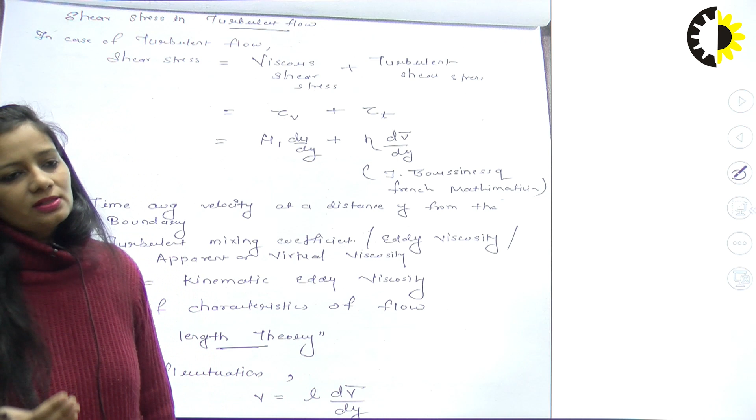We have gone through, and we are repeating it, the shear stress in turbulent flow. The shear stress in turbulent flow is a combination of viscous shear stress and turbulent shear stress, as we know very well. Viscous shear stress is a stress contributed to fluid flow due to the viscosity in between the layers.

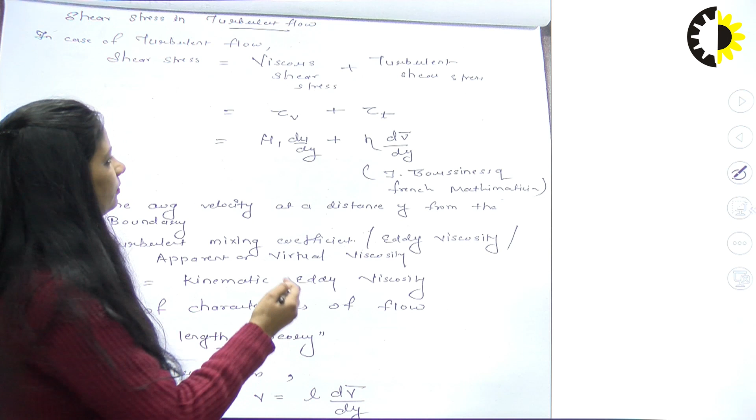Now how can we formulate it? By using the formula tau equal to mu du by dy, where du by dy is your velocity distribution and mu is your viscosity.

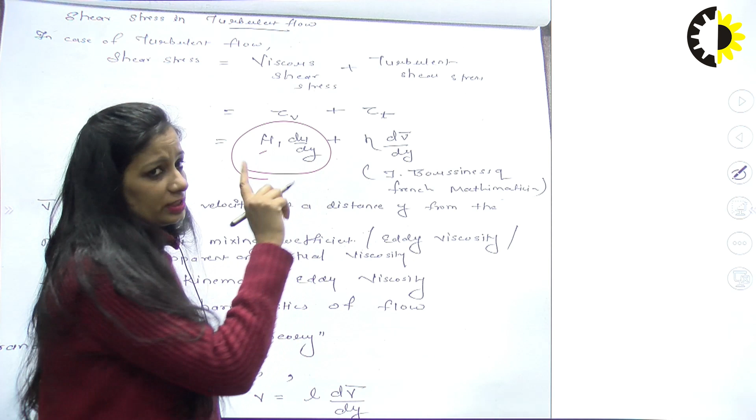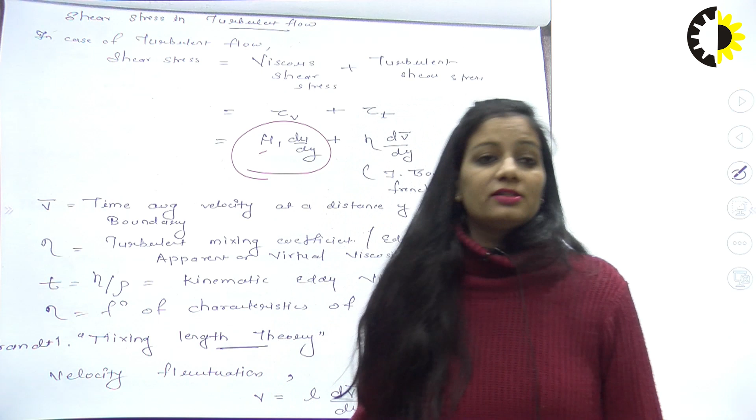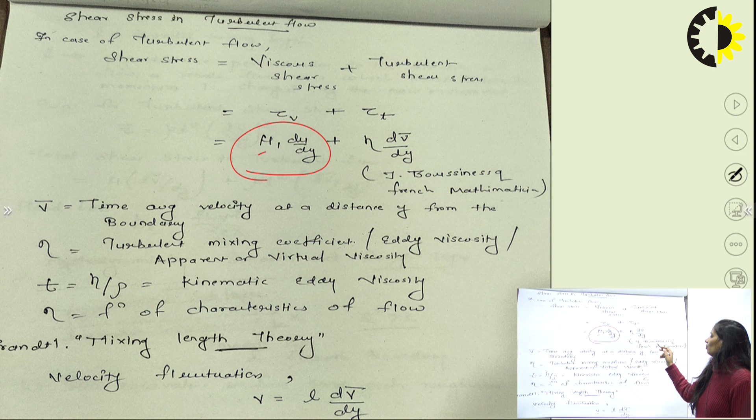Now what is your turbulent shear stress? There are many equations given by many scientists and researchers. The first equation we are going to study today is given by J. Boussinesq, who was a French mathematician, who gave an equation for turbulent shear stress as eta dv by dy.

Here your dv bar, or dv, is actually your time average velocity, at a distance y from the boundary. So v bar is your time average velocity at a distance y from the boundary.

Now what is eta? Eta is your turbulent mixing coefficient, or eddy viscosity. You can simply write it as eddy viscosity. Divided by rho, we'll get it as epsilon, or you can simply write it as T. Now T is actually your kinematic eddy viscosity.

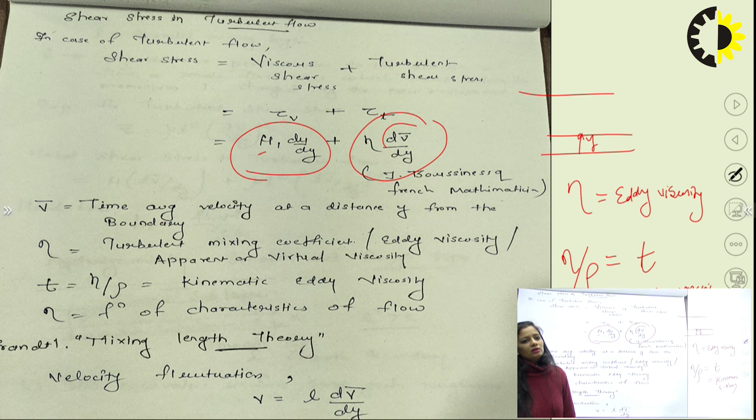Now eta actually depends upon the characteristics of flow, that is, how much the particular flow is turbulent. So your eta will be more if the amount of turbulence is very high. The value of eta also depends upon the Reynolds number of the turbulent flow. If the Reynolds number for a particular kind of flow is more, the value of eta will be more. That's why we say eta is a function of the characteristics of the flow.

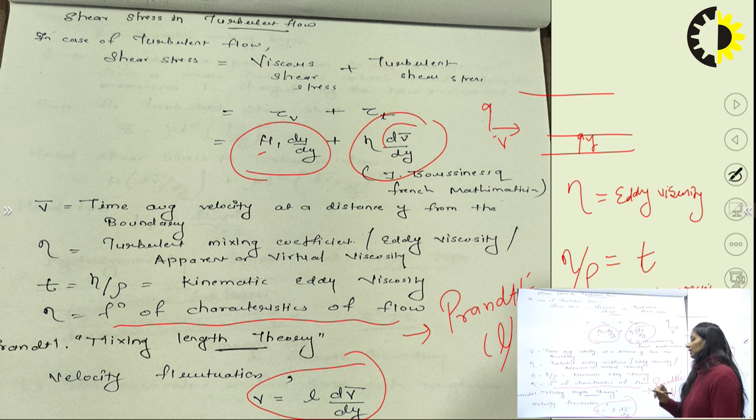Now we are going to analyze Prandtl's mixing length theory. This theory was given by Prandtl, where he formulated the velocity fluctuations, that is, how the velocity fluctuations in the x direction and y direction relate to the velocity gradient. He gave a formula where velocity fluctuation v dash is equal to L dv bar by dy, where L is formulated as the mixing length, or Prandtl mixing length.

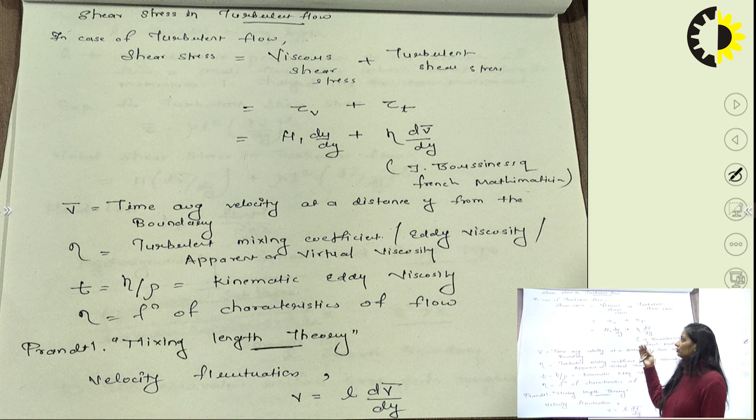Now again, shear stress in turbulent flow, we already talked about this. L is your mixing length, or Prandtl mixing length. How can you formulate L? L is equal to the average distance perpendicular to the direction of flow that a small fluid mass travels before its momentum is changed by the new environment.

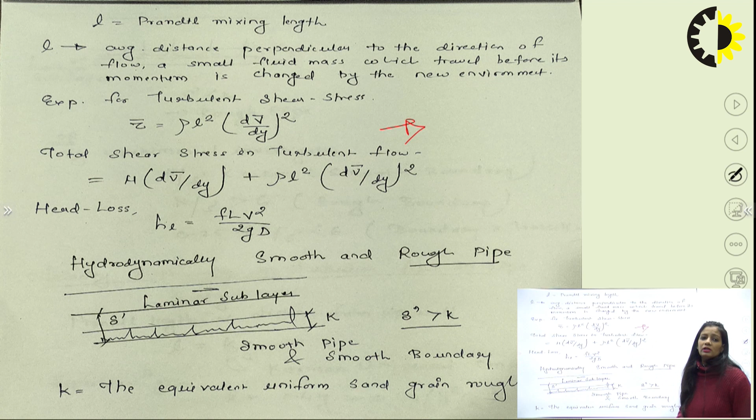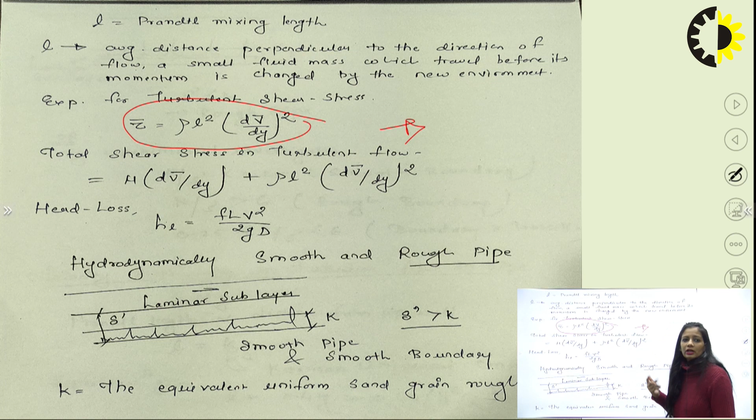Now what is the expression for turbulent shear stress? It will be tau equal to rho L square dv bar by dy square. This is the equation formulated and given by Prandtl, which we can use as turbulent shear stress. Now apply addition of both the viscous and turbulent shear stress, and that will be your total shear stress in any kind of turbulent flow. You can write it as this equation.

Now, when we are going to calculate the head loss in any kind of turbulent flow, how do we calculate it? We use the Darcy-Weisbach equation, which we know very well. We can use that particular formula here also. Your HL will be equal to FLV square by 2GD.

Now, what is your hydrodynamically smooth and rough pipe? How can we define it? It depends upon the length, or rather the height, of the laminar sublayer. We know very well what is the laminar sublayer.

This is a zone in turbulent flow where the flow characteristics are actually laminar, or the flow behaves like a laminar flow. Here you can see that the distance from here to here is actually the height of the laminar sublayer. The distance k here is your equivalent uniform sand grain roughness, or the average height of roughness. For example, this is your k.

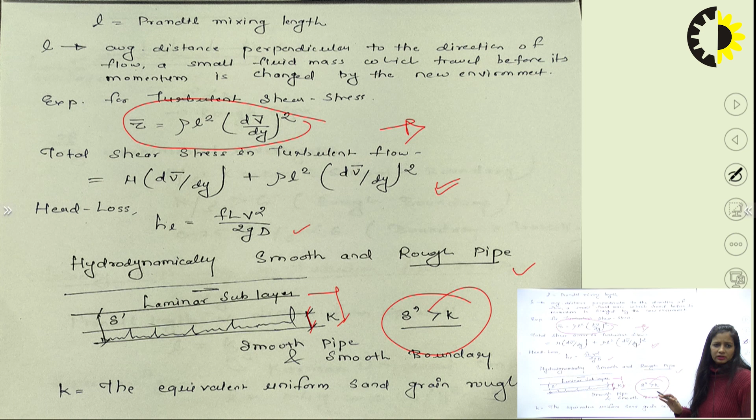Let us suppose if your laminar sublayer height is more than the roughness height, what will we say? In this case, we'll say the pipe is smooth, or the boundary is smooth. But in the other case, just opposite of that, if the laminar sublayer is actually less than the equivalent sand grain roughness, then we will say that the particular pipe is rough.

By experimental investigation, you can differentiate between smooth and rough boundary. There is an expression which states k by del less than 0.25, then you say it's a smooth boundary. If it is greater than 6, you say it's a rough boundary. If it is in between 0.25 to 6, the boundary is in transition.

Now the velocity distribution in turbulent flow in pipe. You can formulate it using Prandtl's equation. Prandtl says the mixing length L is proportional to y, where y is the distance from the boundary. When we move away from the boundary, the Prandtl length is proportional to y. More far from the boundary, the more the value of L will be.

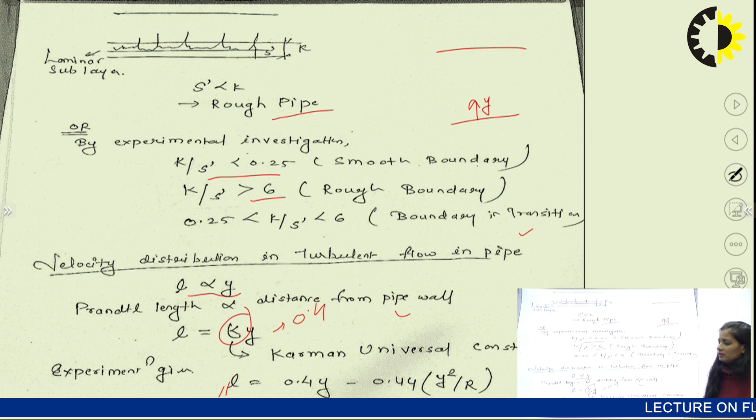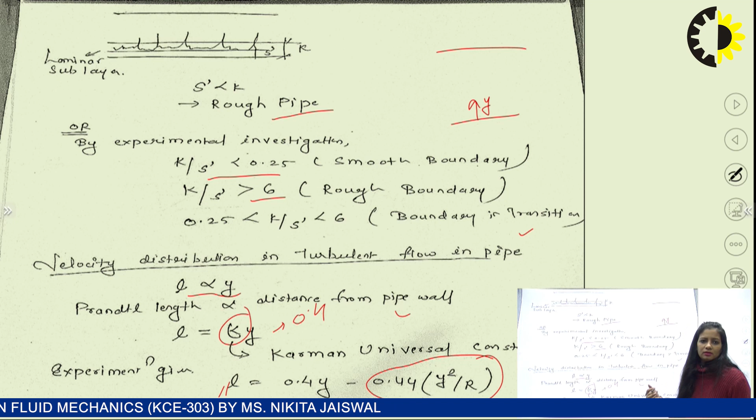So L is proportional to y, or the Prandtl length is proportional to distance from the pipe wall. When you remove that proportionality sign, you get kappa, or the Karman universal constant. The value for the Karman universal constant we assume as 0.4. There is another equation given by Prandtl: L equal to 0.4y minus 0.44 y square by r. This term is very negligible when we are very close to the pipe boundary, so by comparing this equation and this equation, you can get kappa as 0.4.

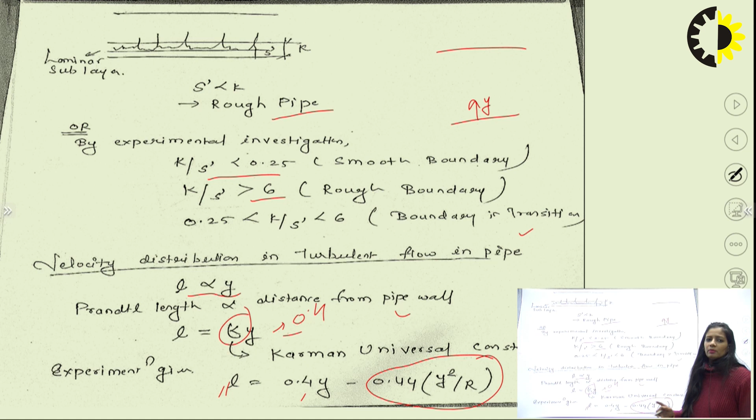Kappa is the Karman universal constant. For y very small, kappa is 0.4. Now the equation for tau is rho L square (dv by dy) whole square. Just put kappa y in place of L, and you get the new equation for tau as rho k square y square (dv bar by dy) whole square.

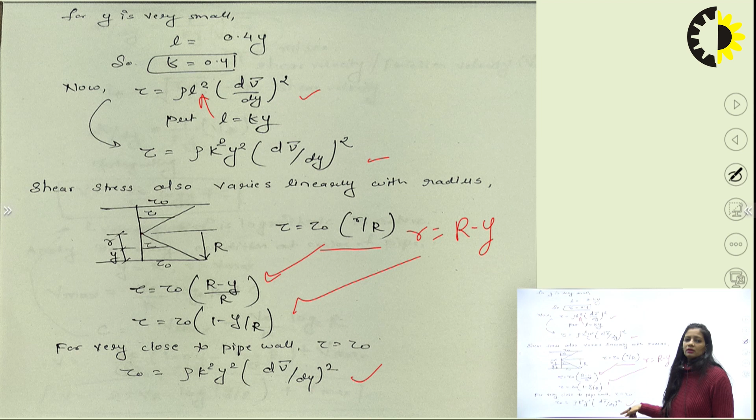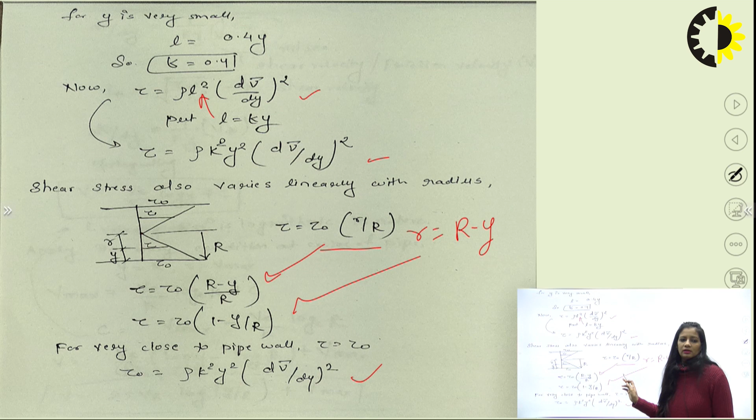Get an equation for tau as tau naught times r by capital R. Now just put small r as capital R minus y, and you get tau equal to tau naught times (1 minus y by capital R). For very close to the pipe wall, tau equals tau naught. Write the previous equation in terms of wall stress: tau naught equal to rho k square, where k is kappa, the value 0.4, times y square times the velocity gradient square.

Now find an equation for dv by dy. You get it as 1 by kappa y, times root over tau naught by rho. This term, root over tau naught by rho, actually has a unit equal to velocity, so we call it shear velocity or friction velocity, represented as v asterisk. Put v asterisk into this equation.

Now you get an equation like this. Our purpose was to find the equation for velocity, so you just need to integrate that equation. Integrating once, since v asterisk and kappa are constants and the only variable is y, integrating 1 by y gives log y plus c, a constant of integration. So you can see that the velocity distribution is logarithmic in nature.

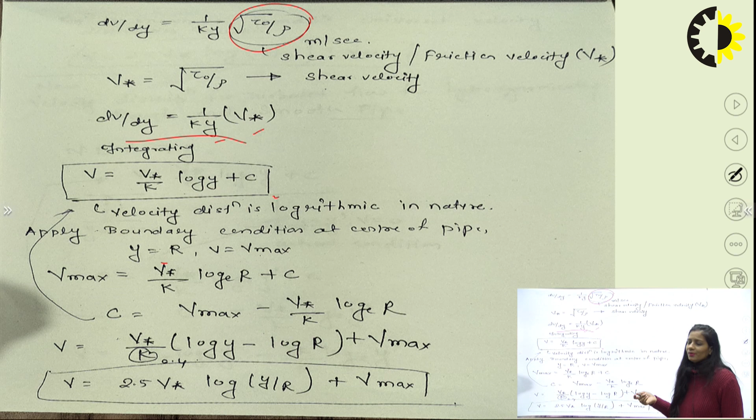Now apply the boundary condition at the center of the pipe: at y equal to capital R, v equals v max, since the velocity at the center of the pipe is maximum. So you write v equal to v max, then put it in the above equation to find the equation for the constant of integration. Put that constant back into the previous equation and solve it to find the final result.

Okay, solve it, that means put a value of kappa as 0.4, you will finally get the formula for final velocity distribution in turbulent flow in terms of Prandtl equation, or Prandtl concept. The final formula for velocity will be equal to 2.5 v asterisk log y by r plus v max. This equation is known as Prandtl's universal velocity distribution equation.

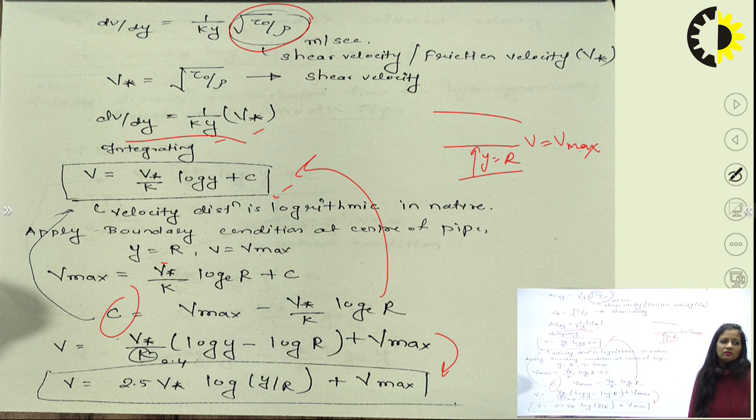So now the velocity distribution for turbulent flow. This is the previous equation, the basic equation. V equal to v asterisk by kappa log y plus c.

So here what the actual condition states: when you apply the derived equation to the actual form, or apply some experimentation, what theoretically we say is that the velocity at the wall will be 0, or at y equal to 0, velocity will be equal to 0 - that's the theoretical concept. But in the actual situation, when you apply the same formula, you will not get velocity as 0 at y equal to 0; instead you will get it as minus infinity.

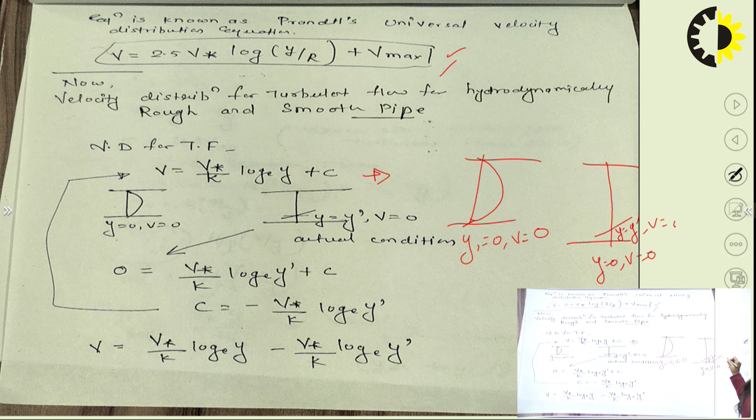So what we assume is that according to that particular derived formula, at y equal to 0, v is not equal to 0. Instead, we consider that at some distance from the wall, let us suppose y equal to y dash, the velocity will be equal to 0. So the actual condition we have stated: at some distance y equal to y dash, velocity will be 0.

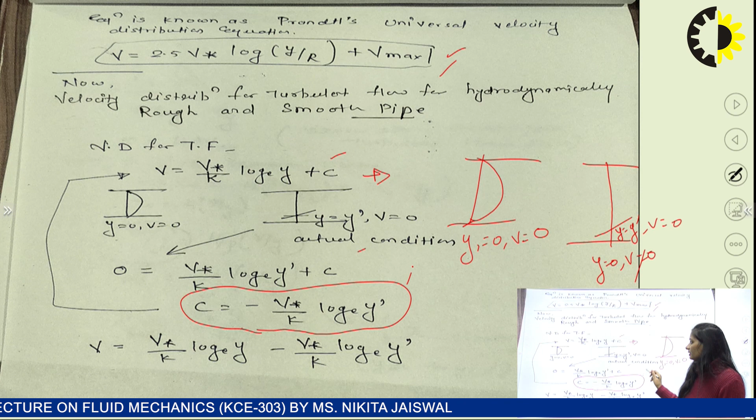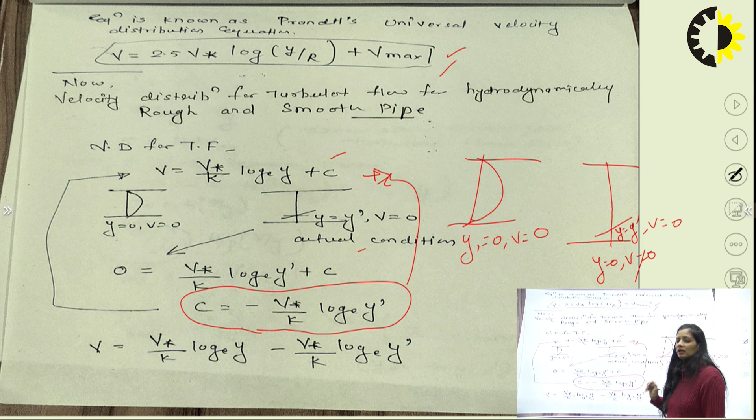Now in this formula, put v equal to 0 and y equal to y dash, and again formulate the equation for the constant. The equation for the constant is minus v star by kappa log e y dash. Now put the value for c back in the equation, and we get v equal to v asterisk by kappa log e y minus v asterisk by kappa log e y dash. Now just set that equation aside, we have formulated it.

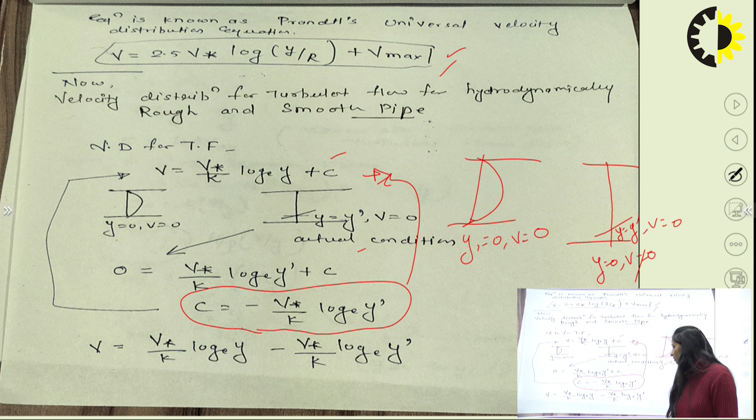Now come to how we can use that formula again in the new topic of velocity distribution in a smooth pipe. We know how we can write the equation for shear stress in a linear form. In a smooth zone or smooth pipe, there will be a linear distribution in the zone close to the pipe boundary. So we can write this as dv by dy equal to simply v by y.

So the viscous shear stress predominates over the turbulent shear stress in case of a smooth pipe. So when writing the final equation for shear stress, we are putting the velocity gradient as equal to v by y in the viscous stress formula only. Now just divide by rho on the LHS as well as RHS. This equation for shear stress in the boundary becomes: tau naught by rho is actually equal to v asterisk square.

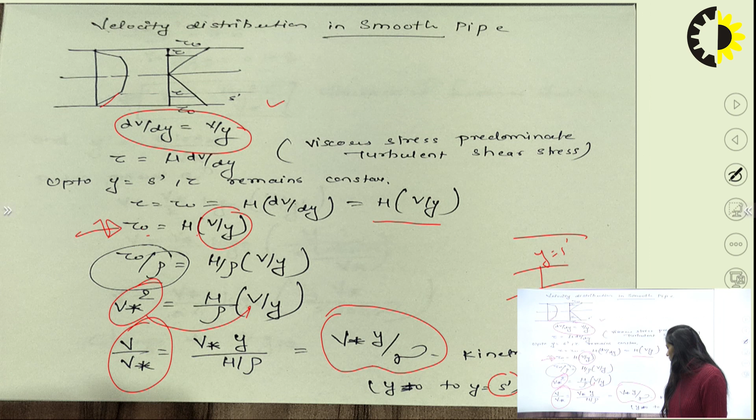Various experiments have already worked upon this particular equation and stated that there are two equations written here. You need to remember that V star delta dash or del dash by nu is actually equal to 11.6, okay. This is at the boundary of laminar sublayer.

You can get the value for this equation as 11.6. When you write the same equation but the height is y dash, where the actual velocity is 0, you get the value for this equation as 0.108.

So formulate the value of laminar sublayer height or thickness of laminar sublayer. You get del dash equal to 11.6 nu by V star, and your y dash will be equal to 0.108 nu by V star.

Now the equation we formulated just before 2 slides, you can play back, you have already formulated this particular formula. Now in this formula, just put this equation which contains 0.108 nu by V asterisk. Put in this equation, put all the other values, as kappa we know is equal to 0.4, put kappa as 0.4, change it to log 10.

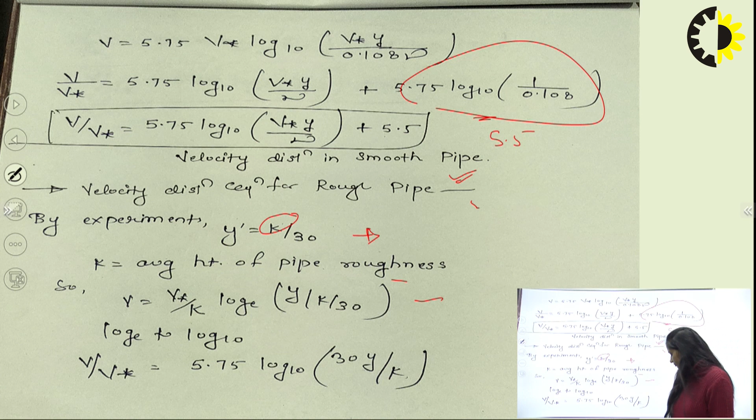Now here you can get it as V by V asterisk equal to 5.75 log 10 y by k plus 5.75 log 10 30. Just convert this equation to numerical value, and you get 8.5.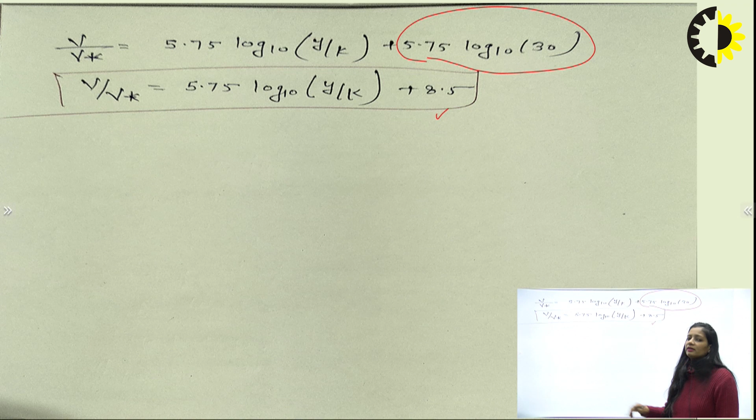So you can write the final equation for velocity distribution, here we have started for rough pipe. You get it as V by V star equal to 5.75 log 10 Y by K plus 8.5. So now we have just arrived at how you can differentiate between rough pipe and smooth pipe in terms of velocity distribution equation.

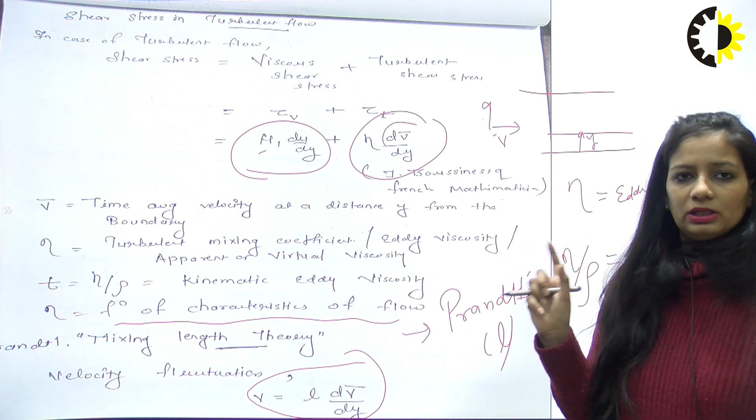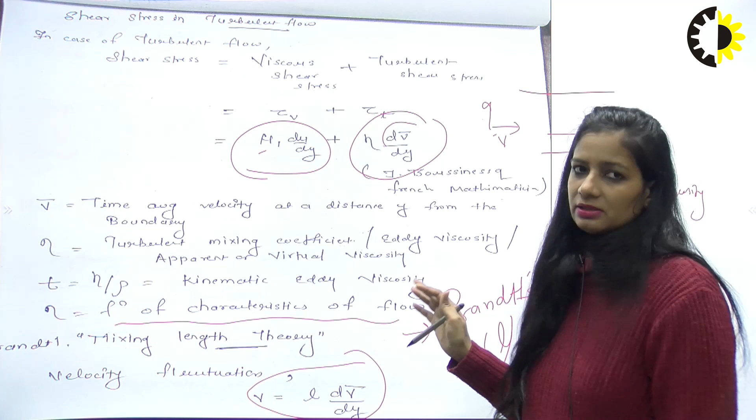So again we started from the shear stress in turbulent flow. There are two equations, Boussinesq equation and the Prandtl mixing length equation. We will not do any numericals based on this equation, we'll do some numericals based on the mixing length concept. This is how the hydrodynamically smooth and rough pipe and the velocity distributions can be formulated.

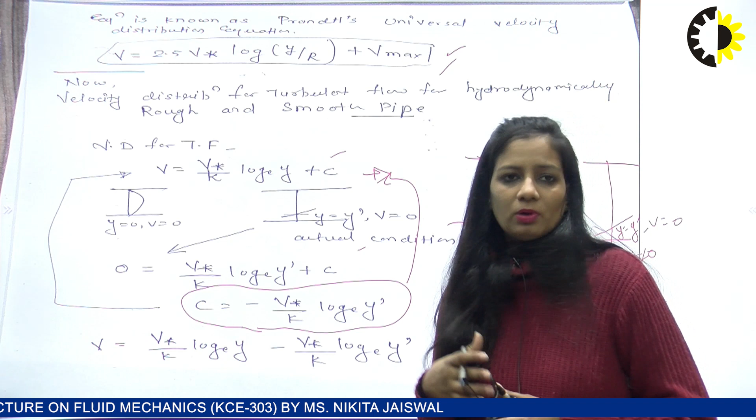When we talk about laminar flow and turbulent flow, there are various variations in both. The analysis or derivations associated with laminar flows are actually somewhat very easy, not like turbulent flow. In turbulent flow, there are various small equations you need to find out and remember, because this is experimental based and you do not have any particular derivation for it.

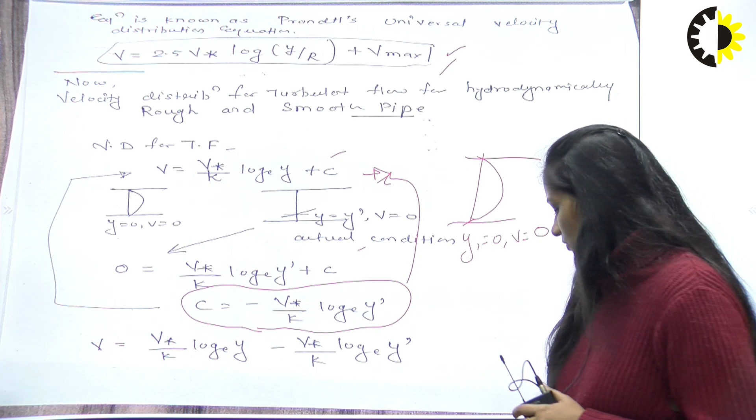You are deriving after getting some inputs from somewhere. I am mentioning this again because this chapter is a little complex, you'll feel it a little complex, so you need to derive it again and again and remember it. For example, when deriving this particular equation, you have to remember that the velocity gradient is put as equal to V by Y in this equation.

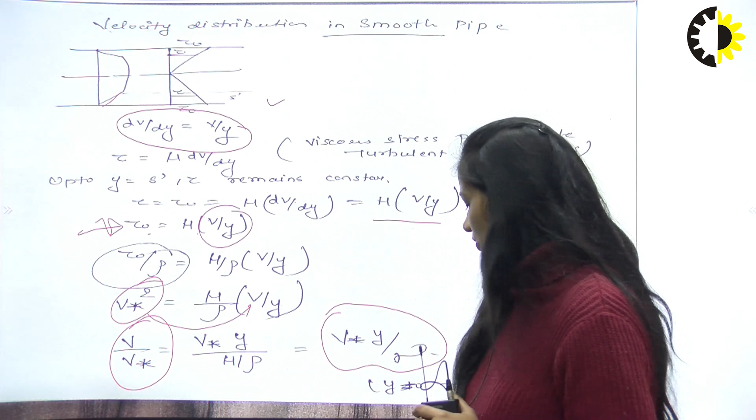And also when we were talking about this equation, we directly applied V star delta dash by nu as equal to 11.6 directly here, right? And also V star Y dash by nu as equal to 0.108 directly here, because these equations are experimental based. If we go further and study deep, we can get it how we derive it, but actually it is experimental based, so you need to remember it for your exam purpose.

So there are very small formulas in this particular chapter. This is all for today's lecture. Thank you.